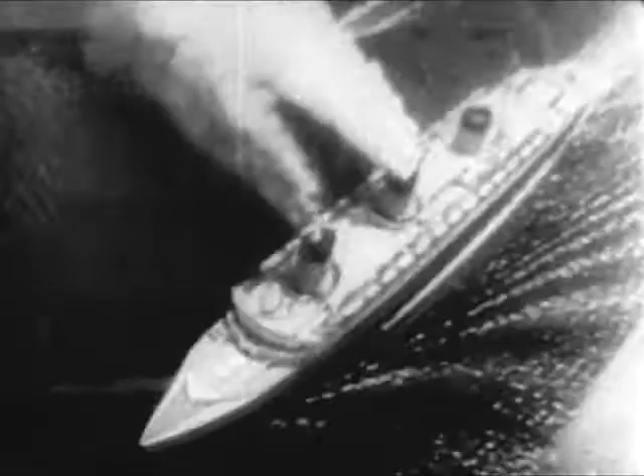The SS Normandie was launched at Saint-Nazaire the 29th of October, 1932. On completion, she was one of the largest and fastest liners afloat. Her general characteristics were length overall 1,029 feet, beam 119 feet, gross tonnage 79,280, displacement 65,000 tons, speed 30 knots, horsepower 160,000. The ship's main propulsion plant was turbo-electric drive through 4 screws.

29 boilers furnished the steam for the turbines. The immense size of the vessel can be visualized when it's realized that any one of the 3 funnels was large enough to hold both tubes of the Holland Tunnel.

The Normandie was requisitioned by the U.S. government after the outbreak of war in 1941. She was transferred to the Navy Department on the 24th of December of that year and renamed the USS Lafayette. The ship was berthed at Pier 88, North River, and work was begun converting her to a troop transport. The conversion included provisions for berthing and messing about 12,000 officers and men and the installation of necessary ordnance.

On the 9th of February, 1942, as the work of conversion neared completion, sparks from a burner's torch ignited bales of life preservers in the Grand Lounge and a fire started. Fanned by a strong northwest wind, the blaze swept over both sides of the promenade deck until by 15:30 it appeared that the entire deck was aflame. Shortly thereafter, the fire caught hold on the quarters of the boat deck, sun deck, and on the bridge, so that the 3 upper decks in practically all spaces except the theater were enveloped in flames and smoke.

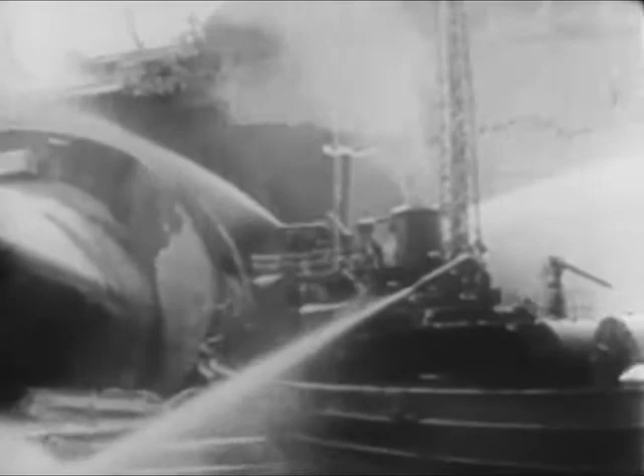The capsizing was the result of a combination of circumstances. First, the reduction of the ship's metacentric height, or stability, to a negative value, causing the ship to heel over. This took place soon after the streams of water had collected on the upper decks. Secondly, the ship's effective freeboard was reduced because of open air and cargo ports on E deck. As the vessel listed past 13 degrees, these ports were submerged. Thirdly, a further loss of stability and consequent increase in heel due to the port bilge forward grounding on the rock ledge on the falling tide. The ship was completely flooded fore and aft up to the outside waterline.

The Secretary of the Navy appointed a special committee to make recommendations with respect to salvage or other disposition of the USS Lafayette. The recommendation of the committee was that the vessel should be raised. The Bureau of Ships placed the vessel under the cognizance of the Supervisor of Salvage, Commodore W.A. Sullivan, who in turn was succeeded by Captain B.E. Manseau. They had at their command the facilities of the Navy Salvage Service, which consists of the salvage section of the Merritt, Chapman, and Scott Corporation, operating under the General Ship Salvage Contract, NOBS 36.

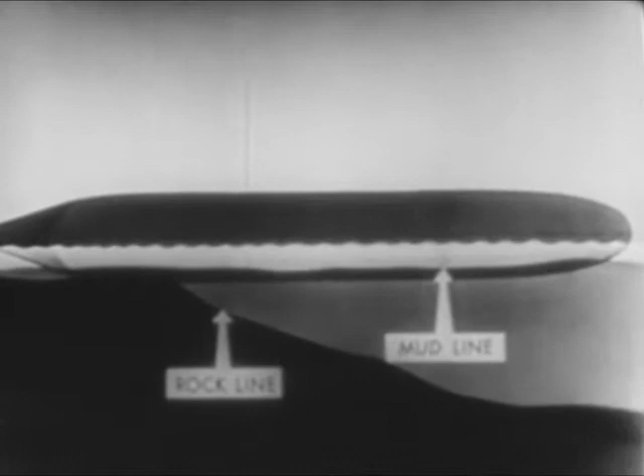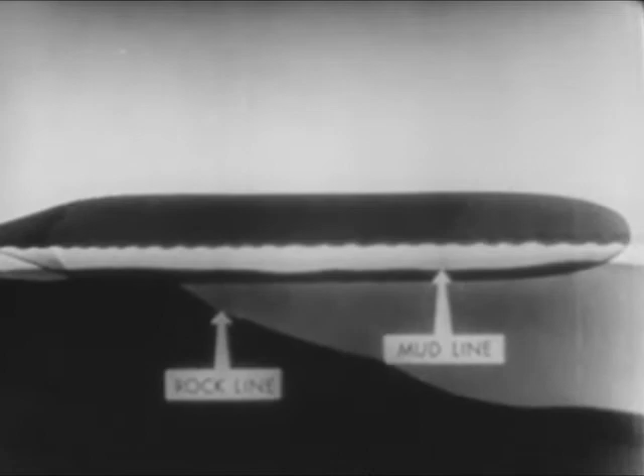At a point about 1/3 the length of the vessel from the bow, the rock profile of Manhattan sloped steeply off into the riverbed. A considerable portion of the vessel's weight rested on this rock shelf. The after 2/3 of the length of the ship was supported and surrounded by mud and soil of various densities. Actually, the possibility of salvage by pumping depended upon the soil in which the after portion of the ship rested ultimately developing enough bearing to resist the initial tendency to settle by the stern. It was the decision of the engineers that the ship should be raised by controlled pumping.

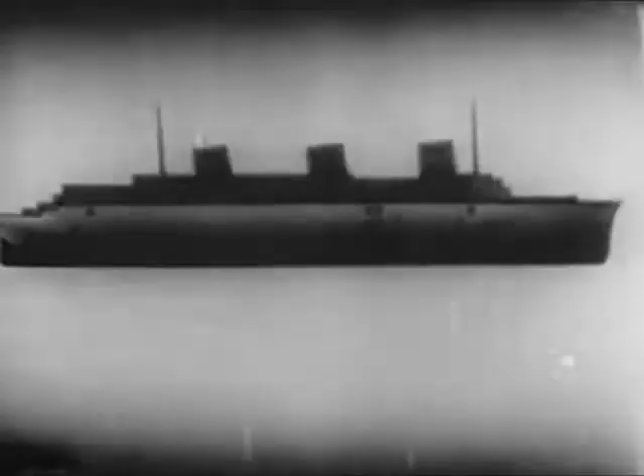To supervise the work, engineering offices were erected on a barge alongside the Lafayette, and details were worked out in the main offices of the Merritt, Chapman, and Scott Corporation. Upon Mr. A.C.W. Seekey, naval architect and consultant engineer, Merritt, Chapman, and Scott Corporation, rested the entire program of stability and strength calculations. The preliminary step in the salvage operation was the removal of the superstructure above the promenade deck.

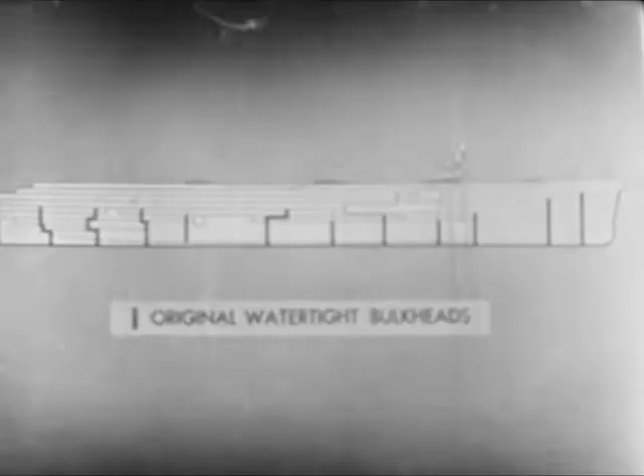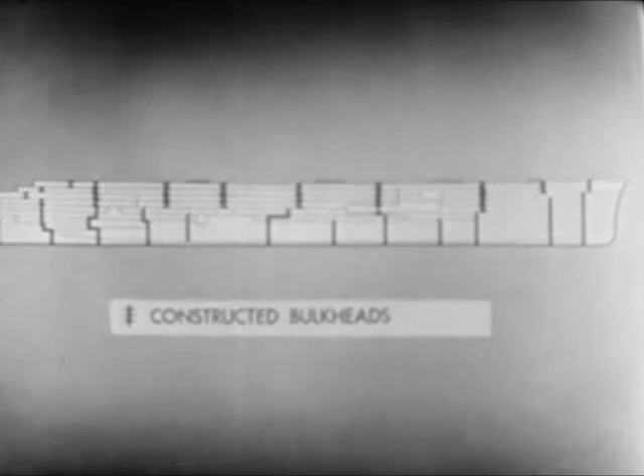Controlled pumping involved the division of the ship into numerous watertight compartments. The compartmentation of the ship was based upon the original watertight bulkheads. Wooden watertight bulkheads were constructed between decks where no original watertight bulkheads existed. To complete the compartmentation, the promenade deck and certain decks below were made watertight. This compartmentation was necessary to control the relationship between the center of gravity and the center of buoyancy during righting operations, and also to control any unforeseen leaks or failures.

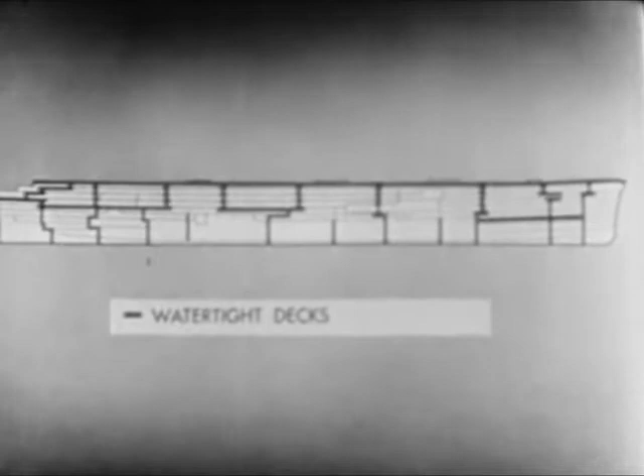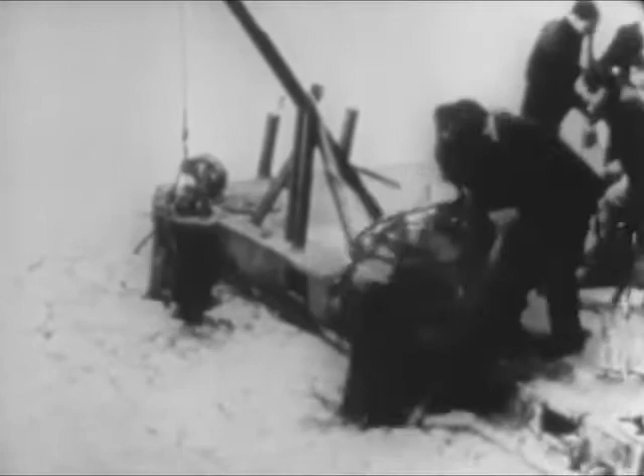At the beginning, there was only a limited number of experienced divers available. Consequently, 2 diving schools were organized at Pier 88, 1 civilian and 1 for Navy divers. As the student divers gained proficiency in handling underwater tools and the diving dress, they were sent out to do underwater work on the Lafayette. Eventually, as many as 73 civilian divers were employed at one time, besides a considerable number of Navy divers.

Diving conditions were extremely hazardous. Jagged steel edges and broken glass were an ever-present threat. The maze of debris-packed passageways presented a terrific problem. The men worked in complete darkness, the water in the slip containing such an amount of mud and sewage that underwater lights were useless. Work was accomplished by sense of touch alone.

Approximately 5,000 tons of superstructure was removed, slightly less than half of which was submerged and was cut away by divers using the underwater gas torch. These decks were removed to lower the center of gravity and to make accessible the various uptake openings for patching.

When the Lafayette capsized, furniture, stores, and other loose objects accumulated on the port side, blocking passageways, making it necessary for divers to clear away this debris before commencing the actual salvage construction. All minor cabin bulkheading and ship's piping was removed to lighten the ship as much as possible and to make room for the watertight bulkheads. These operations often were carried on in 50 feet of water and 10 feet of mud, since much of this debris had settled to the lowest possible point, the submerged port side of the ship.

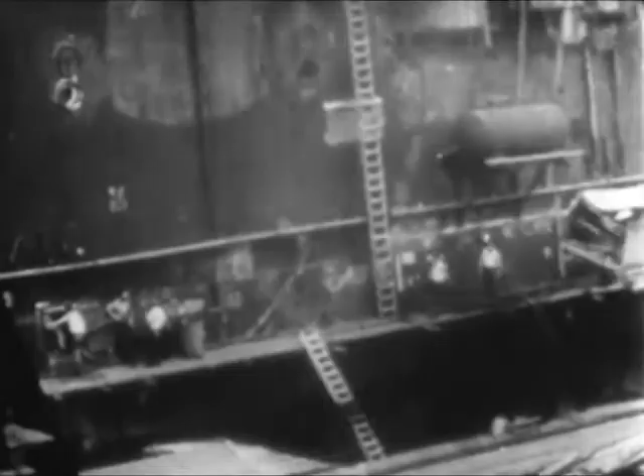After capsizing, cargo passages became vertical shafts, and through these shafts, scrap material was hoisted from the interior of the ship and deposited on barges lying alongside. Records were kept of the weight removed for future calculation.

A miniature industrial city sprang up on the starboard side of the Lafayette. Air compressors for the diving units, portable power generators, tool sheds, banks of cylinders containing cutting gas, firefighting equipment, winches, small derricks, catwalks, welding machines. Power and water lines ran the length of the hull.

Barges were moored along the almost vertical face of the promenade deck. These contained the blacksmith shop, the carpenter shop, machine shop, and engineering office, while other barges used as lighters passed to and from the ship carrying material and scrap. During salvage operations, the Lafayette presented a strange appearance to those aboard ships passing up and down the busy Hudson River, much like a giant Gulliver overrun with busy Lilliputians.

To prevent any possible damage to the starboard screws, they were removed prior to righting operations. Each of the screws weighed 23 tons. The port screws, being submerged in 50 feet of mud and water, could not be removed.

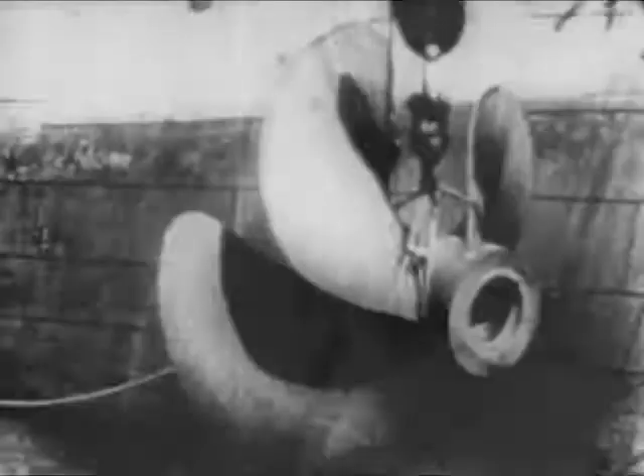The interior of the ship, as she lay on her side, presented another strange spectacle. Bulkheads became decks. Decks became bulkheads. Elevator shafts were used as companionways, and the former port-side passageways were used as elevator shafts. Stairways and ship's ladders were useless, and carpenters were kept busy during the entire salvage operation building wooden ladders, platforms, and scaffolding to facilitate movement of men and materials throughout the interior of the ship. Miles of ladders and thousands of feet of lumber were used in this construction.

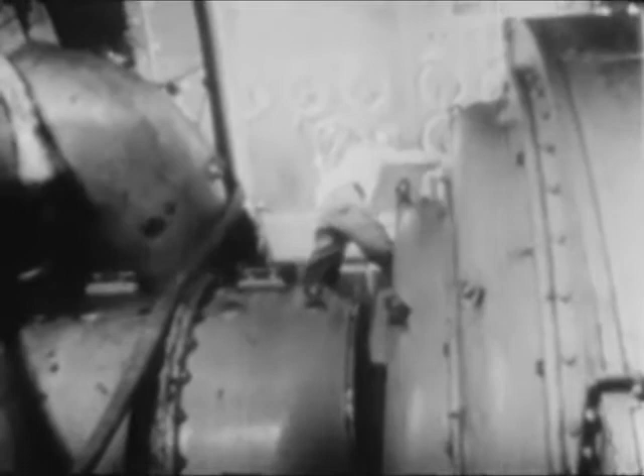Immersion destroyed the ship's electric system. 3 of the 4 turbines were inundated. But after the ship was raised, the blading of the turbines was found to be only slightly corroded.

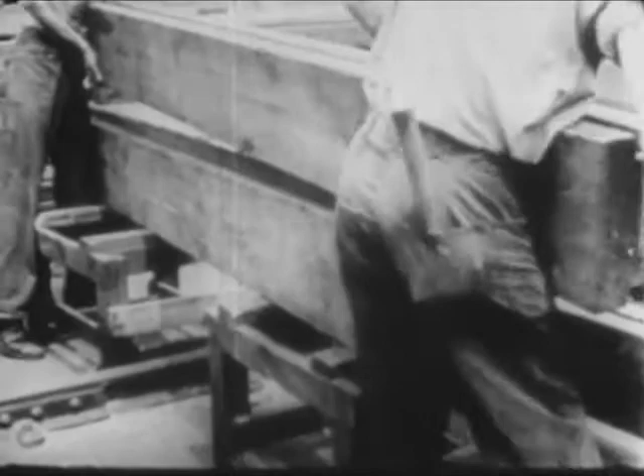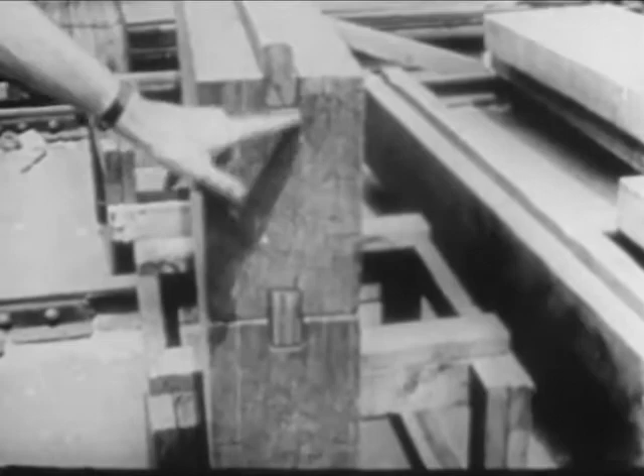To compartment the ship, it was necessary to install large wooden bulkheads. The bulkheads were constructed of grooved 8x12 timbers with a 2x4 joint. Approximately 210,000 board feet of 8x12 timbers and form lumber was used in constructing these bulkheads. If all bulkheads were placed together, they would make a bulkhead 350 feet long and 60 feet deep. The placement of bulkheads in the Lafayette followed this plan.

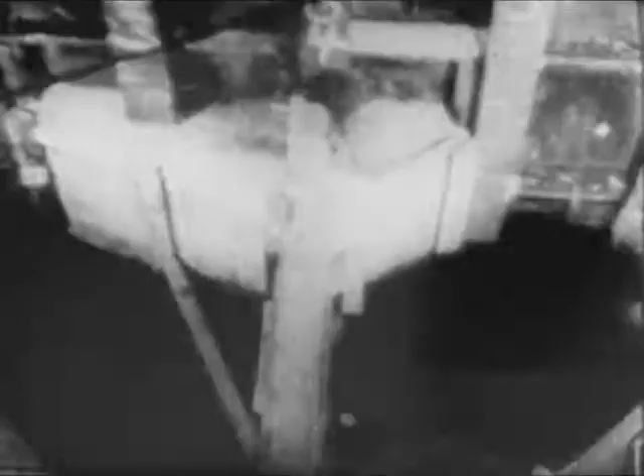For water tightness, concrete was poured where the wooden bulkheads met the ship's steel decks and where they met the skin of the ship. The concrete was poured underwater using the Tremie process. The concrete was pumped into forms by a Pumpcrete machine, sealing the wooden bulkheads to the steel structure of the ship. These bulkheads were built from above water downward, and 900 cubic yards of a 1-2-3 mix of concrete was used for the sealing.

To back up cargo ports and airport patches on the port side of the vessel, divers poured bags of concrete over these spots to strengthen them. 16 cargo ports and 356 airports were strengthened in this manner.

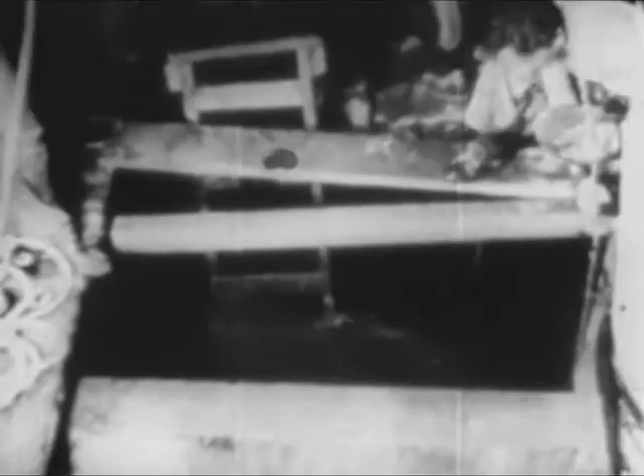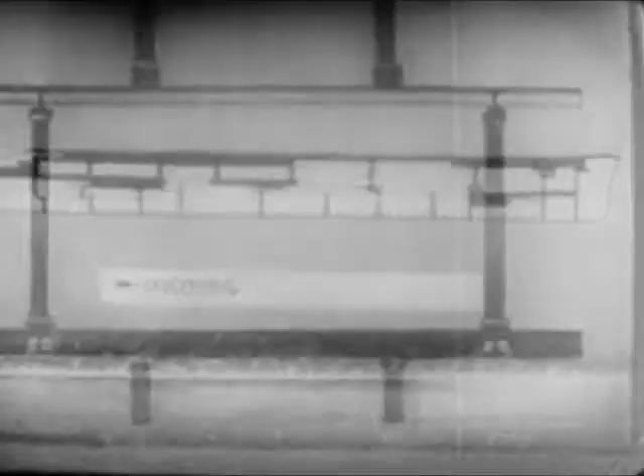The amount of shoring which had to be done is indicated here. In all salvage jobs requiring extensive pumping, the ability of decks and bulkheads to withstand the hydrostatic heads expected requires thorough consideration. Timber beams were placed between the original deck beams to support the deck plating against water pressure. The shoring extended from these timber beams to timber stringers on the deck below.

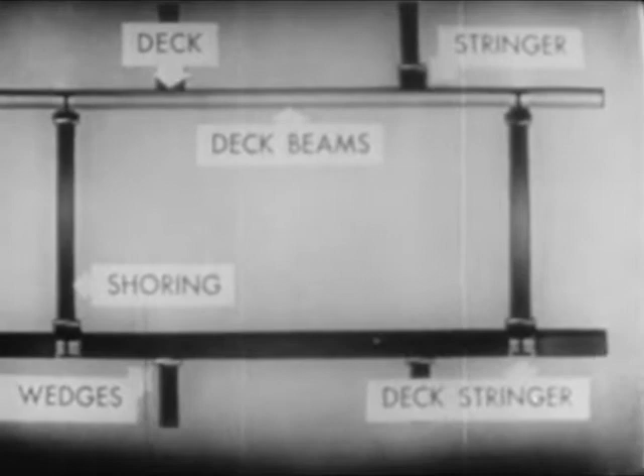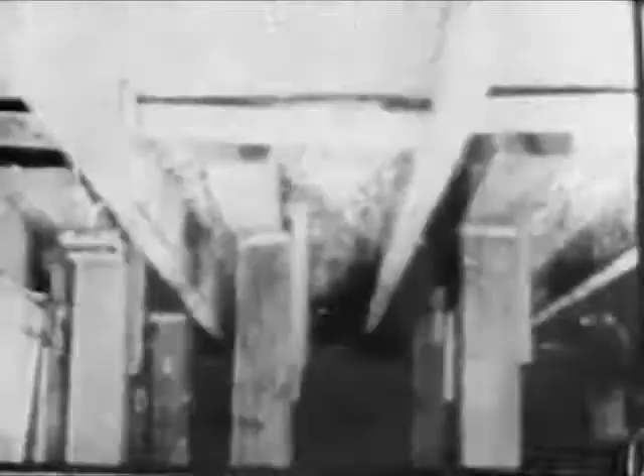This is the shoring at C deck after the ship was raised to 30 degrees. A total of 90,000 board feet, or approximately 1.5 miles of shoring timbers, were used, and all the immense amount of material was placed and aligned by divers.

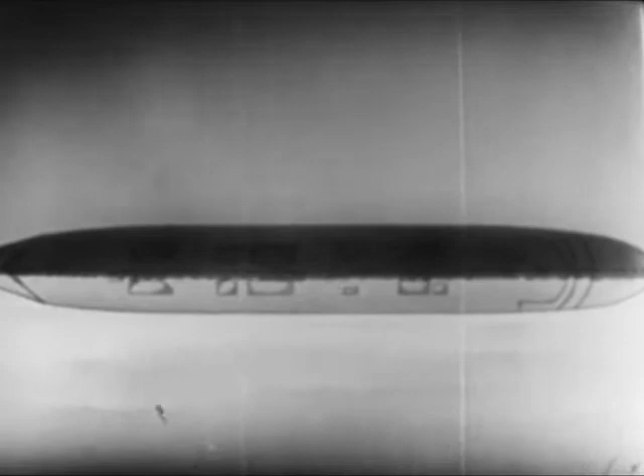Here are indicated the underwater openings on the promenade deck, which necessitated the construction of special patches.

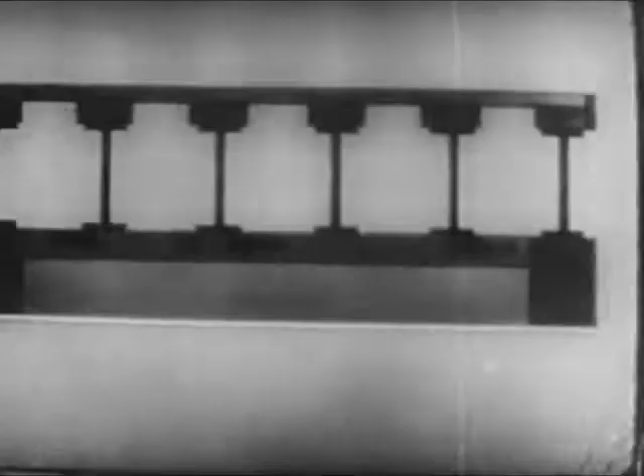The main patches were constructed in this manner. It is interesting to note that 21-inch steel I-beams were used. Also, that rubber gaskets used in patches were made from rubber recovered from the Lafayette's decking.

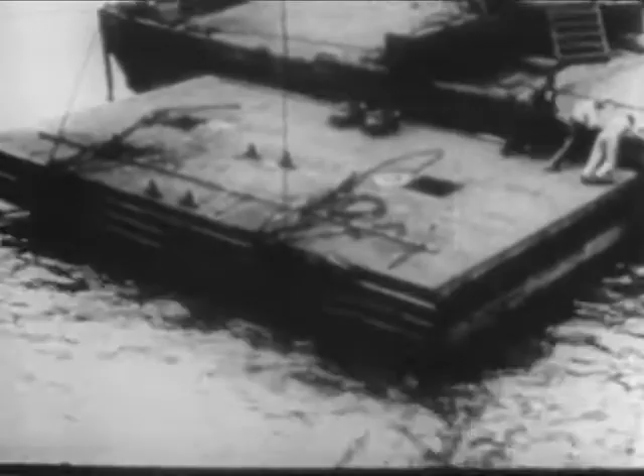The patches for the various openings were constructed on the barges moored alongside, and when completed, were placed in position through a combined operation of men on the surface, divers, and derricks. Here, a turbine uptake patch weighing 21 tons is being lowered into the water preliminary to transferring it to a vertical position for placement against the ship.

All large patches were equipped with gate valves through which water was permitted to flow to keep the water levels inside and outside equalized until ready to commence pumping. The valves also permitted flooding during pumping operations should that become necessary.

When the patches were properly seated, the rods or bolts which had been previously secured at the inboard end to a suitable ship structure by means of hinge shackles or levers, were run through corresponding bolt holes in the patches and bolted up by divers from the outside.

Captain J.I. Tooker, one of Merritt Chapman and Scott's leading salvage officers, was made superintendent of the work on the Lafayette. Captain Tooker was well suited for the Lafayette job in view of his previous experience in salvaging capsized vessels, and particularly in view of his many years' experience in diving.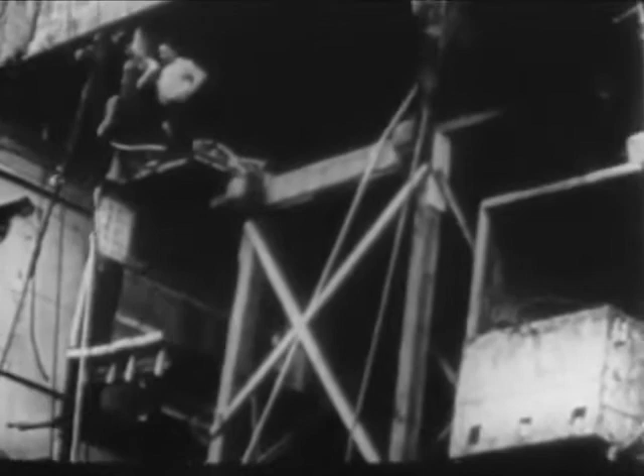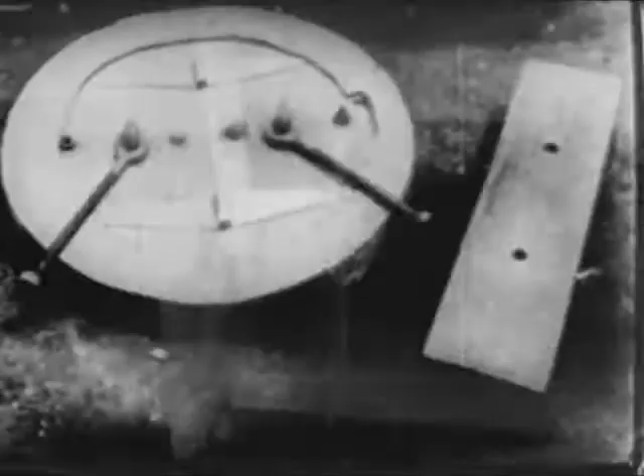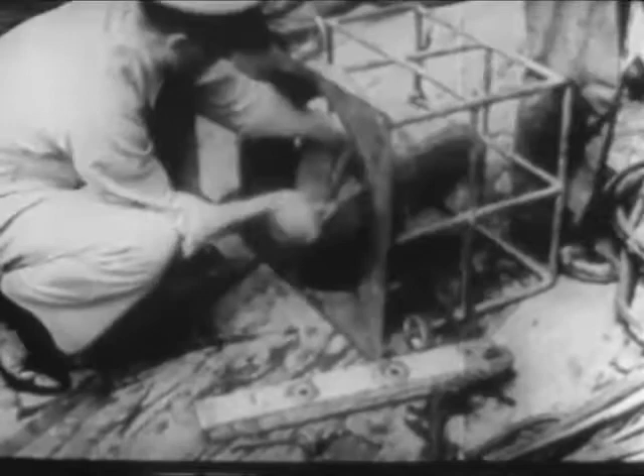Porthole patches were hinged discs of wood with strong backs. The patches were hinged to enable the diver to place the patch through the porthole from the inside of the ship. It was often necessary to excavate 10 feet of mud to place these patches, and sometimes it required a week's work for the placement of one patch. 356 patches were placed in this manner, one diver working the entire period of salvage operation on this job alone.

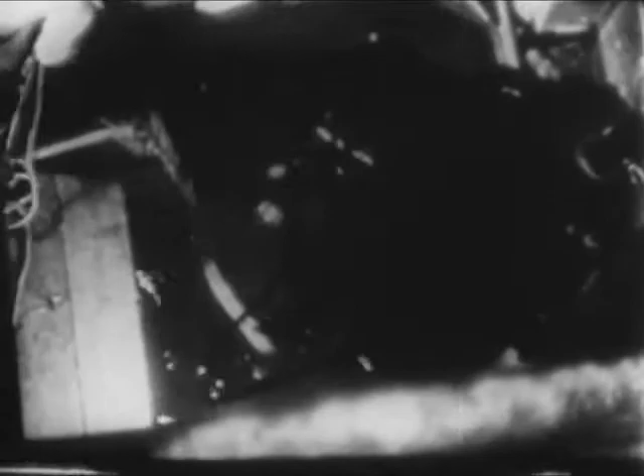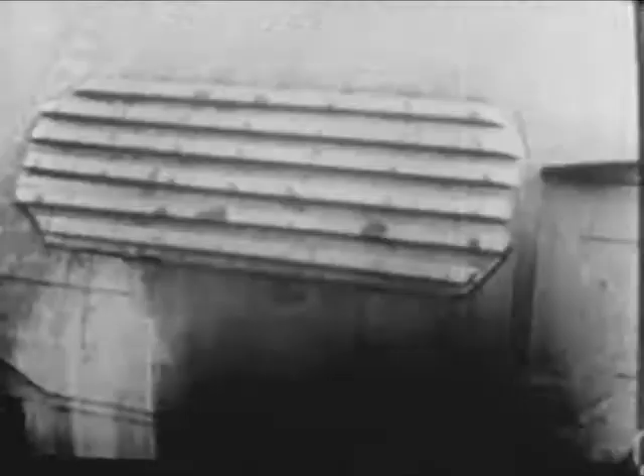As a safety precaution, the starboard condenser intake was covered with a wooden patch to ensure water tightness when the ship was righted. Wooden plugs were used to seal 4,500 small openings. All patches, plugs, shoring, and bulkhead timbers were prefabricated in the carpenter and blacksmith shops located aboard the barges moored alongside the face of the promenade deck.

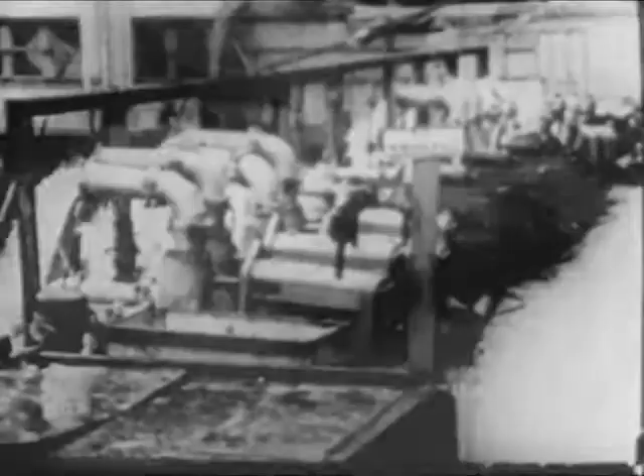Pumping of the Lafayette was accomplished by the use of 40 10-inch pumps, 32 6-inch pumps, and 25 3-inch pumps, capable of discharging 40,000 tons of water an hour. They were tested on the pier previous to installation. The placing of the pumps inside the vessel, just prior to the righting operations, was a hazardous and difficult job, involving in many cases considerable ingenuity on the part of the riggers.

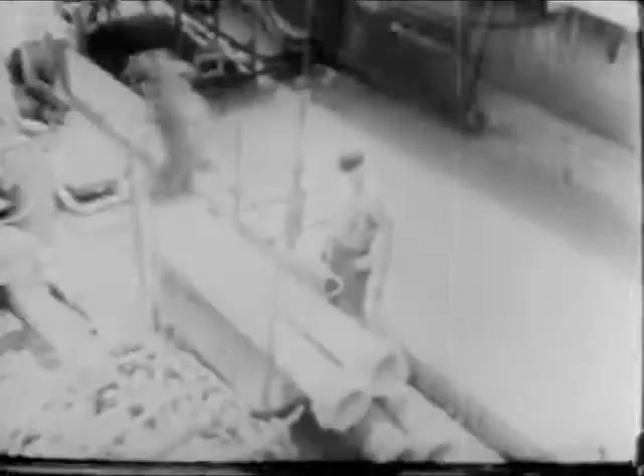It was necessary to locate a suitable number of 10-inch and 6-inch pumps in each of the watertight subdivisions of the ship to adequately de-water the compartments in a short time, and at the same time to provide a reserve to handle unexpected leakage. It was also necessary to have enough initial reserve capacity available to compensate for the expected reduction due to increasing head as the water level dropped and the vessel rotated.

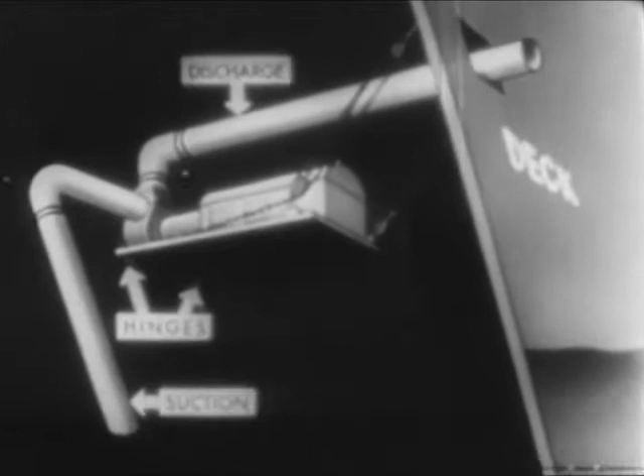In each case, suctions extended to the port side of the ship and, where possible, close to the watertight boundary of each compartment. Discharges ran nearly horizontal through the promenade deck. The pump platforms were hinged to the vertical decks and rigged in such a manner that as the ship rotated, the pumps could be kept in a horizontal position by slacking off on chain falls.

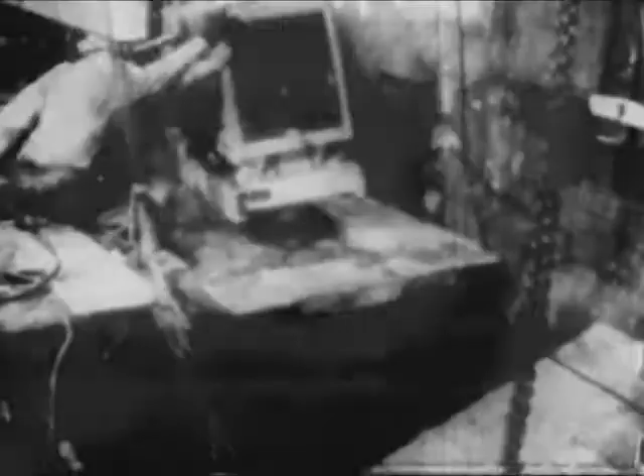In order that gasoline-driven pumps would not exhaust in the compartments, flexible steel exhaust lines were carried up to the starboard side of the ship and out through air ports.

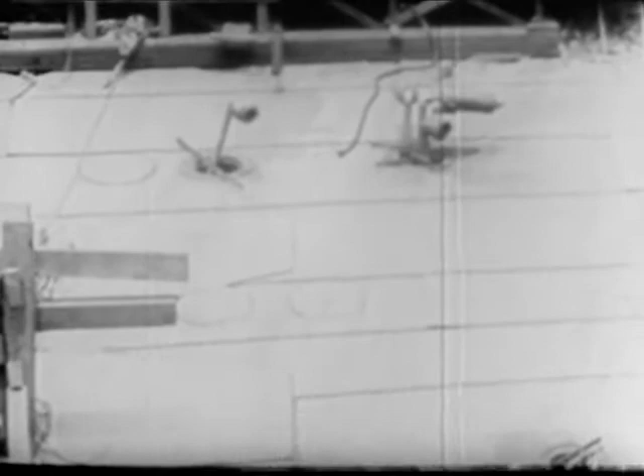When the Lafayette capsized, her rudder cut under the pier about 5 feet, shearing 5 piles supporting Pier 88. Since that portion of the ship still projected under the pier, it was necessary to remove a portion of the pier at this point to avoid any possible damage to the stern of the ship during righting. As a further precautionary measure, pile clusters were driven to act as fenders for the vessel to bear against as it approached a 45-degree position.

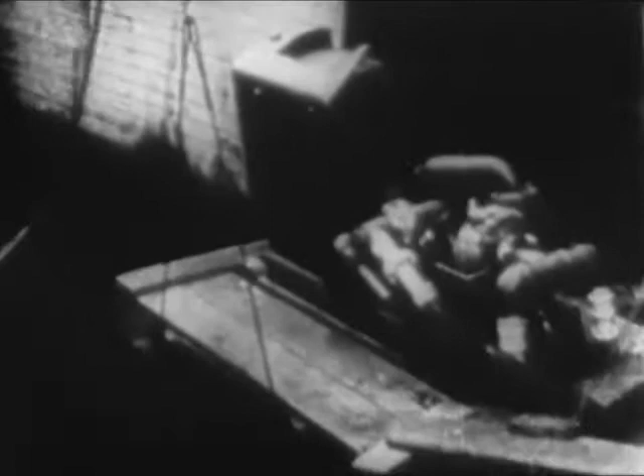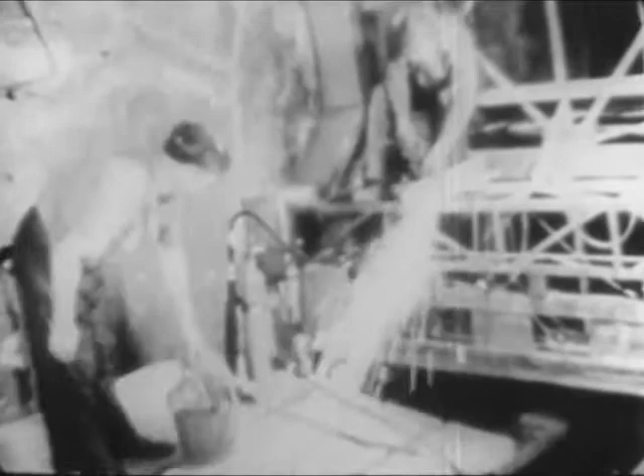From the very beginning of the salvage operations, it was necessary to take extraordinary fire precautions. After the initial fire and capsizing of the vessel, the embarrassment that might be caused by subsequent fires during salvage operations made it necessary to take exaggerated precautions, even though the probability of further damage to the ship because of fire was very small. Smoking was not allowed inside the hull while the ship was being cleaned or cleared, or during the final pumping operations when the possibility existed of gasoline fumes permeating the ship. A fire watch was always posted whenever there was burning with an oxyacetylene torch.

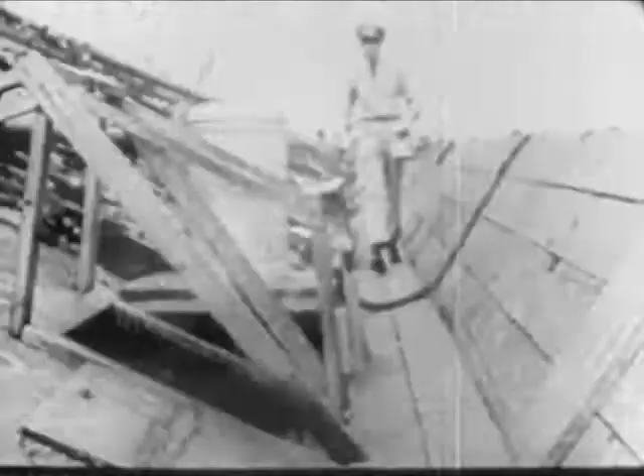Various gas testing devices and implements were used throughout the salvage of the vessel as a constant precaution against the formation of gas from organic materials within the ship, and that created by the immense amount of city sewage draining into the slip in which the ship lay.

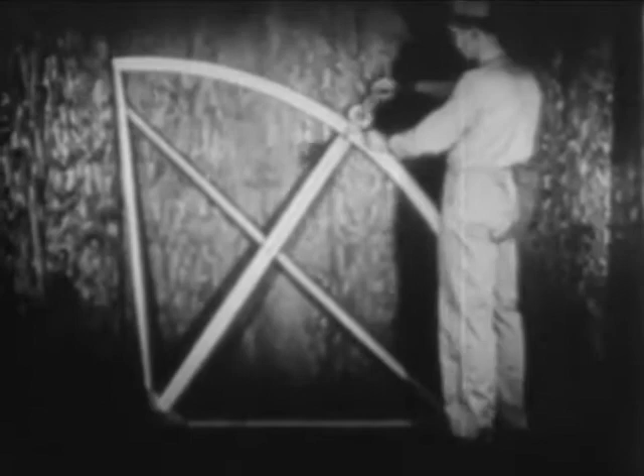4 instruments were constructed to give an accurate picture of the exact position of the ship at any time during righting operations. Draft and tide gauges were installed at various points throughout the ship. A clinometer was constructed to record the angle of list of the ship.

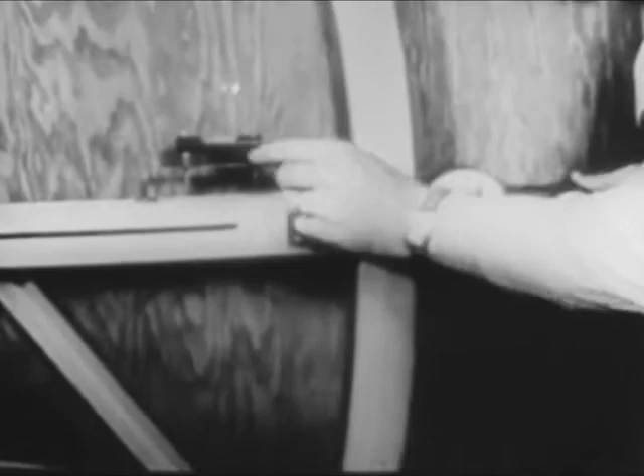A movement gauge was installed to indicate the movement of the ship toward Pier 88. The compartment testing was completed with the 2nd of August, and after thorough preparation, an overall pump test was made for a 48-hour period, during which time divers applied sawdust to all patches and seams where minor leakage might exist, with the result that the ship was nearly bottle tight.

Pumping operations were under the direct supervision of Captain B.E. Manseau, USN, supervisor of salvage, and Captain Tooker. Because there was no particular reason for speed, and because it was extremely important to build up no forces or develop leakage which could not be controlled, pumping continued cautiously, and each rising tide was utilized to supply the additional buoyancy necessary to move the ship.

Air and water jets installed in various patches on the port side and along the port edge of the promenade deck were started and maintained continuously in order to relieve any mud suction that might exist. At 0800 on the 6th of August, there was a 16-foot negative head. With the rise in tide, the buoyancy increased, and at about 1/2 tide, the vessel started to roll slowly and steadily.

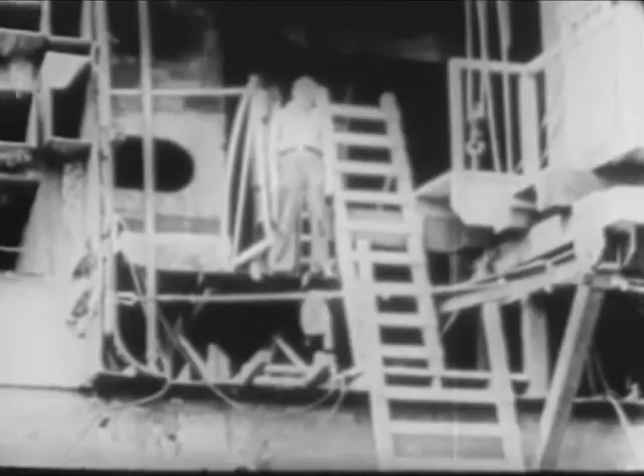During the pumping operations, readings were taken every 15 minutes on the movement gauge, draft gauge, and clinometer. These readings were all transferred to the control office on the ship for the recording and plotting of the movement of the ship.

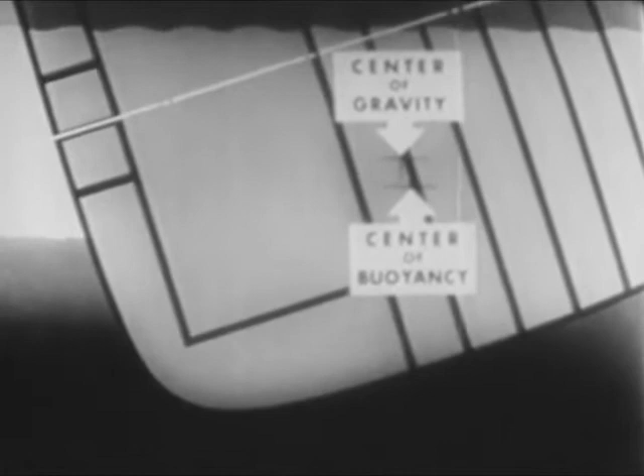In its initial capsized position, with all decks above the promenade deck removed, the center of buoyancy was about 2 feet farther from the keel than the center of gravity. This gave the Lafayette the initial tendency to right itself. As water was pumped from the ship, the buoyancy increased with a corresponding decrease in the weight of water in the ship. Also, the distance between the center of gravity and the center of buoyancy increased. The result was an increased tendency of the ship to right itself, pivoting about the turn of the bilge.

It became apparent that each time the water in the ship was lowered relative to the outside water level, the ship started to rotate, and the instant pumping stopped, the ship's movement stopped. It was felt that absolute control could be maintained over the vessel's every movement. During the righting operations, Rear Admirals E.L. Cochrane and J.J. Broshek inspected the ship.

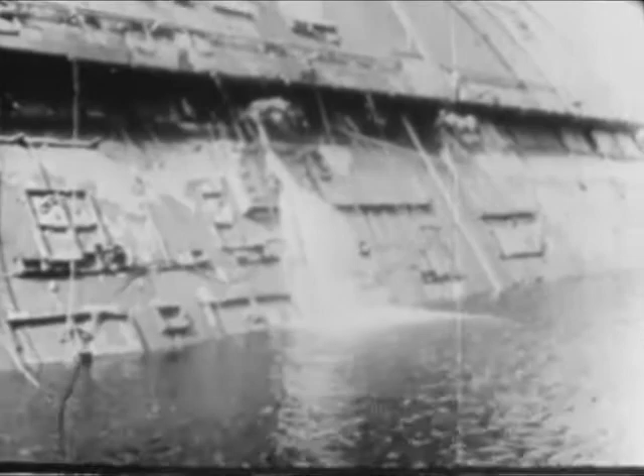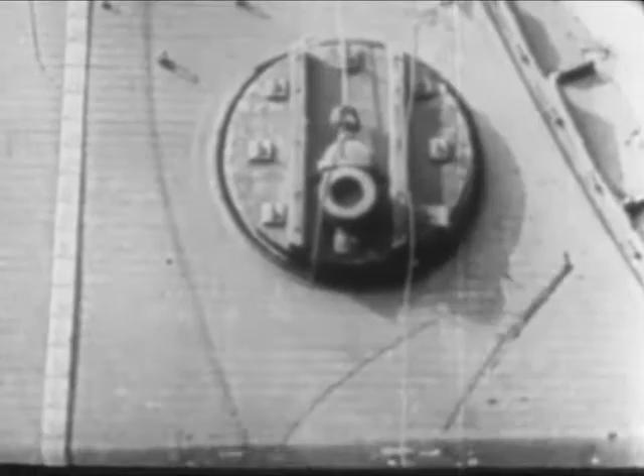As the promenade deck rose above water, the patches became visible. The patches on the underwater or port side of the promenade deck covered openings similar to those on the high or starboard side. Measurements for the underwater patches were obtained by checking the openings on the high side and further checking by divers the underwater openings. Total weight of all these patches was 350 tons, the largest single patch weighing 52 tons. It was 54 feet long, 22 feet wide, and 3 feet deep.

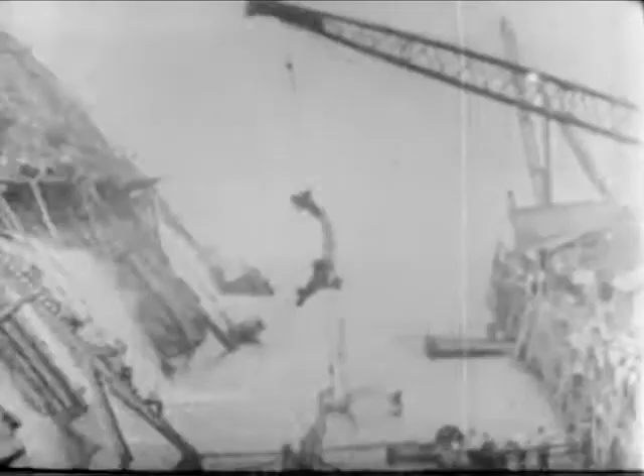During the process of removing all decks above the promenade deck to lower the center of gravity and to facilitate patching, it was found impossible to remove all of the boat deck, the last 10 feet of this deck being so deeply buried in the mud that the divers couldn't reach it. Consequently, when the righting operations had progressed until this remaining portion of the boat deck appeared above water, this section was removed using torches to further lighten the weight on the port side of the ship. Approximately 500 tons were removed.

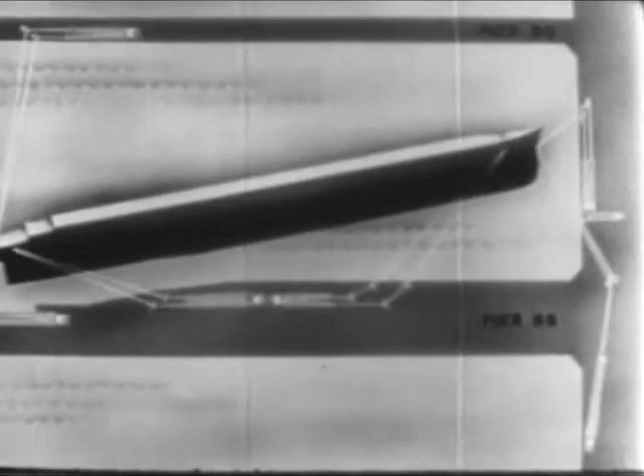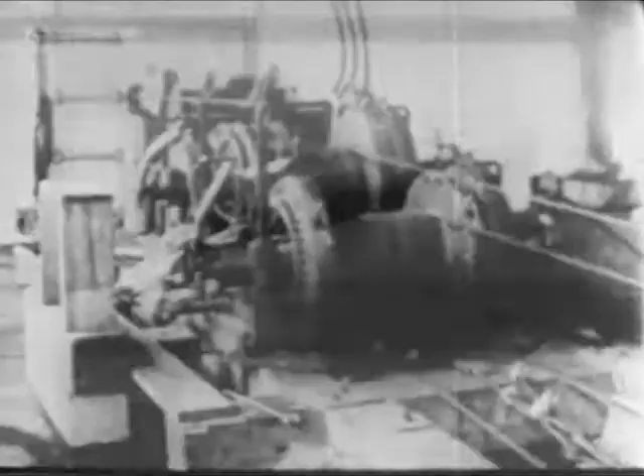In order to secure the fore and aft movement of the vessel in the slip, special mooring arrangements were designed and installed. 40 horsepower, 2-drum winches supplied the hauling power for each set of mooring lines. The hauling part of the standard 9-part beach gear tackle was led to the drum of the winches.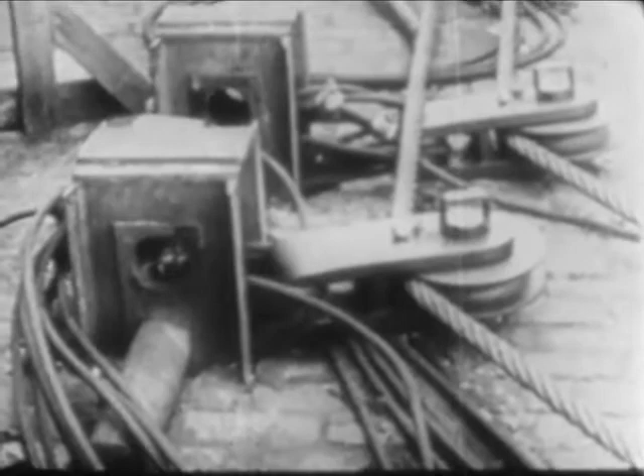As the stern came afloat during the early stages of pumping, a steady pull was maintained on the cables leading to Pier 90, so that by the time the vessel approached its 45-degree position, the stern was well clear of the safety fender pile clusters along the north side of Pier 88.

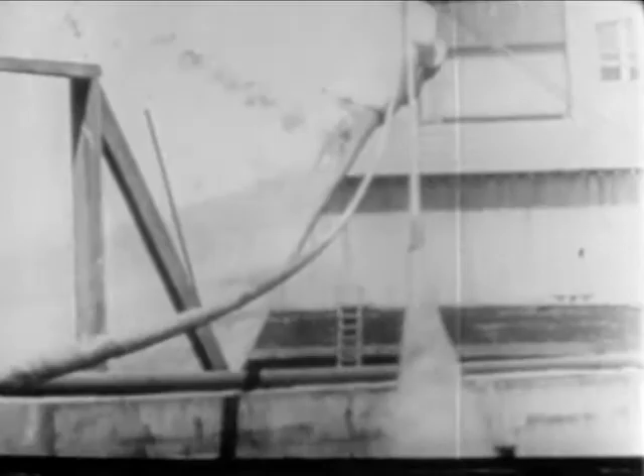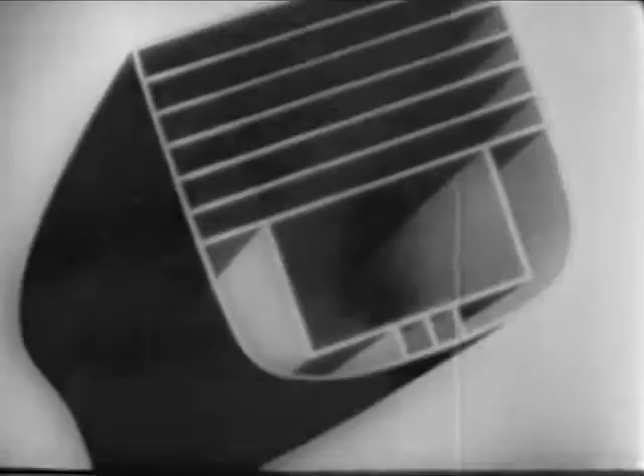Early on the morning of the 9th of August, as the Lafayette reached an inclination of 49 degrees, the pumps in compartment 16 were unable to lower the water beyond the existing level. A leak of extremely serious nature had developed in the way of the rock ledge. The damage occurred just under the turn of the bilge on the port side between frames 224 and 244.

Due to the movement of the ship on the bearing rock, the hull plates had been cracked, the cracks extending 54 feet long and 27.5 feet wide. After the approximate position of the leak was known, divers attempted to stop the leak by using bags of rags. This attempt was unsuccessful.

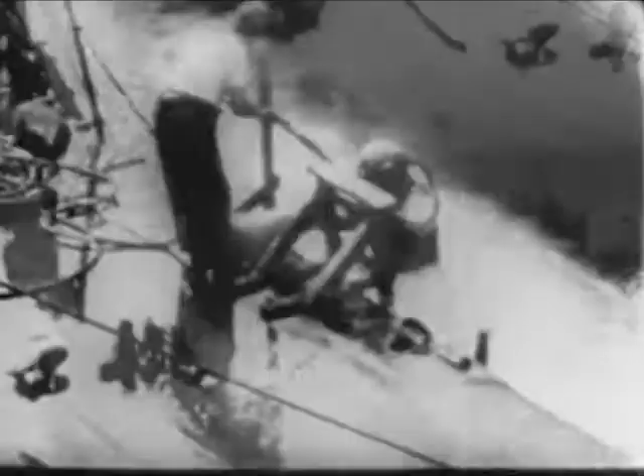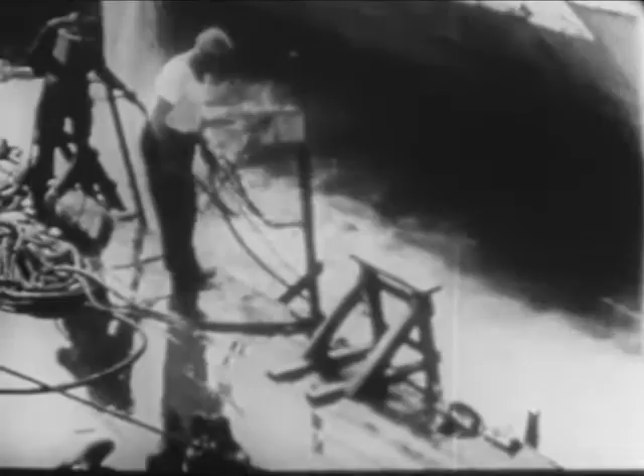A second attempt was made to stop the leak by pouring 100 cubic yards of concrete on the tank top. The concrete pump was used to pump the concrete into place, and pouring was accomplished by the tremie process. The area indicated is the first pour in compartment 16.

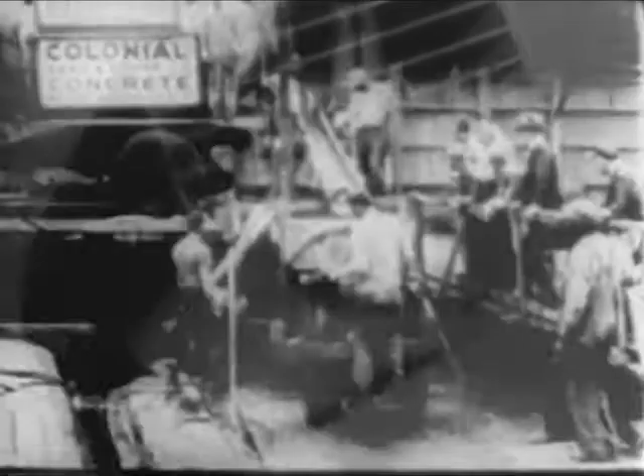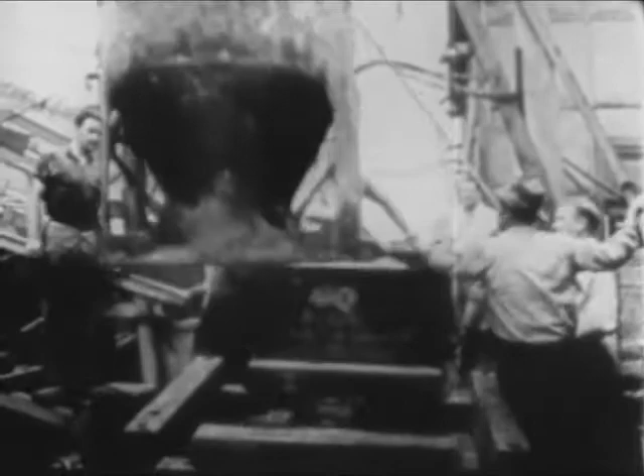At first, this method seemed successful, but suddenly the water commenced to rise rapidly with all pumps going. Subsequent inspection by divers indicated that a rupture in the tanks had opened, abaft the concrete dam which had been previously laid. Following considerable study and search between the 22nd and 30th of August, it was decided to again attempt to stop the leak by filling all the double bottom and wing tanks in the way of any of the ruptures with 800 tons of concrete.

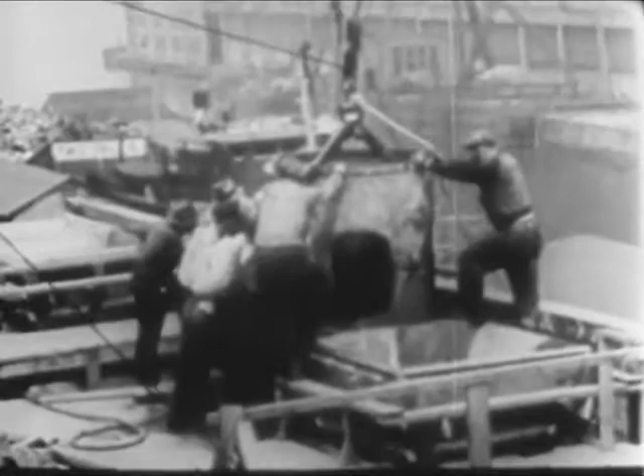In the meantime, by further pumping in compartment 16 and adjacent compartments and ballasting of the starboard side, the list was reduced to 25 degrees. The greater surface covered by the second pour was in the double bottom and wing tanks.

Pumping was again started, raising the ship by parallel rise. And on the morning of the 15th of September, the Lafayette floated clear at both high and low tides. The old water lines left by surface oil could clearly be seen. Divers could now reach the damaged area from the outside, and several thousand bags of rags were stuffed into the cracks.

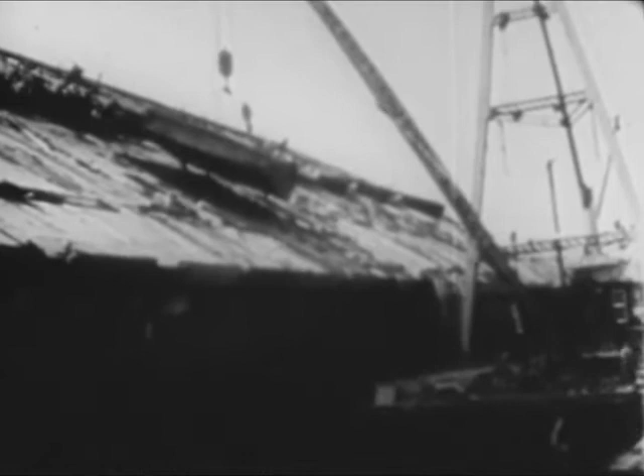From the 16th of September, work was directed toward removing the tremendous amount of timber and concrete construction from the port side of the ship. All port side patches were removed, the removal being a much easier task than the placement. To reduce the list, the starboard wing tanks and double bottom tanks were ballasted with fresh water, and further work continued, removing the remaining water and the large quantities of mud and debris.

A collision mat was placed over the damaged area to secure the leak, in order that the Lafayette could be taken to a dry dock. This mat was one of the largest ever constructed, being approximately 65 feet square, made by sewing standard Navy collision mats together. It was placed and secured by hogging lines attached to the bottom and the top of the mat.

Along with the final cleaning operations and the removal of salvage gear, work was begun preparing the ship for transfer from Pier 88 in the slip where she'd lain so long to the dry dock. Towing eyes were welded along the side of the ship to handle lines from the tugs, and all towing and securing lines were stowed aboard. On November 3rd, the USS Lafayette was transferred from the control of the supervisor of salvage and placed under the cognizance of the commandant of the 3rd Naval District.

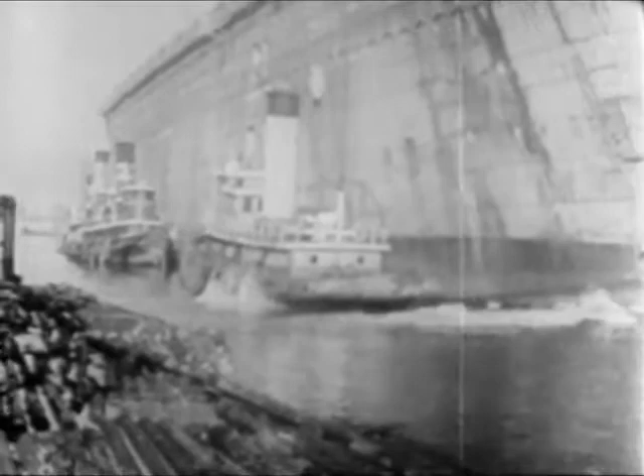On the morning of November 3rd, Captain Manseau and Captain Tooker congratulated each other on a job well done. Behind them, busy tugs bustled in alongside the Lafayette and made fast to her huge, fire-scarred, oil-streaked bulk. At 10:00, she was scheduled to move from the pier. And at exactly 10:00, the great ship began to slide out into the Hudson River.

20 months and 24 days after the first flames had roared from those kapok life preservers, the Lafayette was again underway. On the whole, the entire salvage operation, from the initial development of the plan through the preparation to the final floating and cleaning of the ship, was considered extremely successful. Successful completion of the salvage, at an estimated cost of $4,500,000, is complete justification of the committee's recommendation of salvage, in that a hull greatly exceeding the salvage cost was recovered, and by removal of the ship, two 1,000-foot piers were again made available for use.

Three tugs were bridled at the bow, two tugs worked at the stern, while 15 others crowded along her hull as she slowly moved down the river in the bright November sunshine. When one considers the hazards that attended the salvage work, it is amazing and of credit to the United States Navy that not one single casualty occurred, and comparatively few accidents, despite the fact that the daily average of men employed on the project was 700.

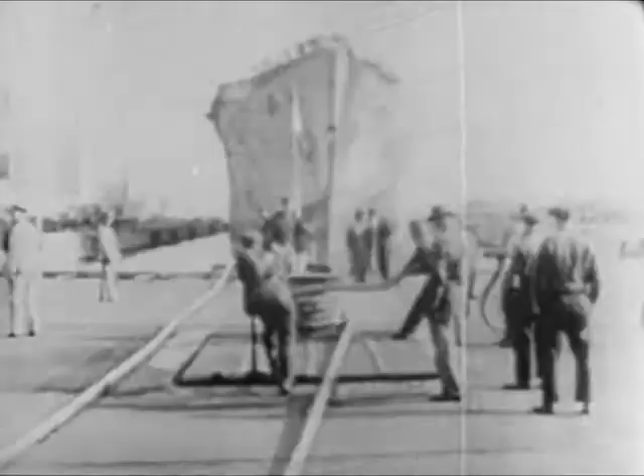Just 17 months and 19 days after the supervisor of salvage was directed by the Secretary of the Navy to conduct the salvage operations, the task had been done. To Commodore W.A. Sullivan, USN, Captain B.E. Manseau, USN, Captain J.I. Tooker, the supervisors, the divers, and other workmen who were responsible for devising means for and the actual accomplishment of the many details of construction and other preparatory work on which the success of the salvage depended, goes the credit for one of the greatest engineering feats of the century.